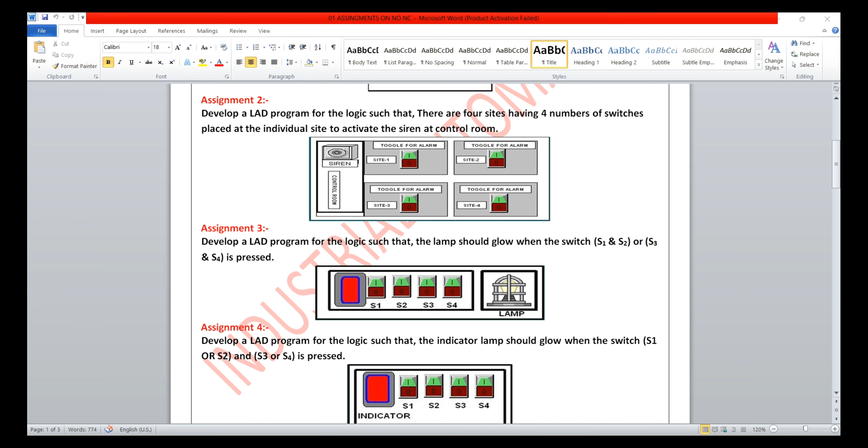सॉफ्टवेयर के अंदर हम कैसे प्रोग्रामिंग देखते हैं, सिमुलेटर कैसे यूज करते हैं। प्रीवियस क्लास में मैंने वीडियो बनाया था कि RSLOGIX सॉफ्टवेयर कैसे ओपन होता है। आज से हम स्टेप बाय स्टेप प्रोग्रामिंग सीखेंगे, कैसे प्रोग्रामिंग एंट्री करेंगे, कैसे इनपुट आउटपुट एड्रेस देंगे।

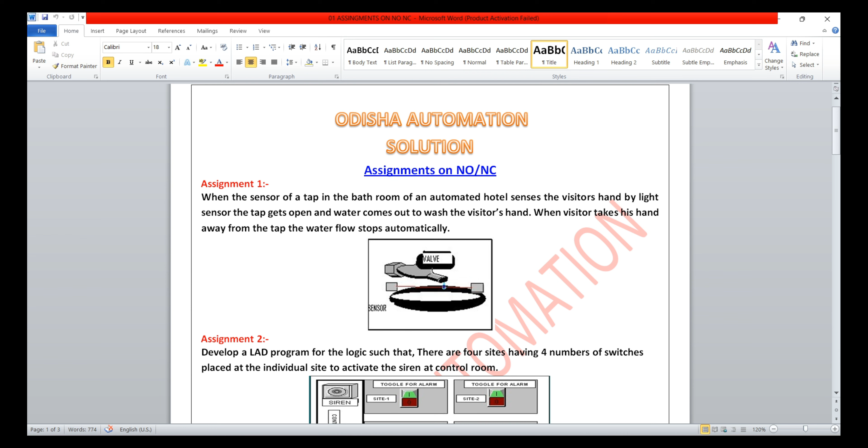पहले हम स्टार्ट करेंगे असाइनमेंट ऑन NO NC। आज हम सीखेंगे NO NC के बारे में। NO मीन्स नॉर्मली ओपन कॉन्टैक्ट और नॉर्मली क्लोज कॉन्टैक्ट। एक स्विच में दो टाइप का कॉन्टैक्ट रहता है, एक NC कॉन्टैक्ट होता है, एक NO कॉन्टैक्ट रहता है।

दोनों कॉन्टैक्ट को लेके हम आज प्रोग्रामिंग करेंगे। देखेंगे प्रोग्राम: Develop a ladder program for the logic so that there are four sites having four number of switches placed at the individual site to activate the siren at control room.

देखिए, four sites is given. This is site 1, this is site 2, this is site 3, this is site 4. Four sites are there and one siren is there in control room. If any emergency happens in site 1, site 2, site 3, or site 4, anyone can toggle the alarm.

Siren ऑन करने के लिए हमें स्विच को ऑन करना है। किसी भी एक स्विच को ऑन करने से सायरन ऑन होगा। ये प्रोग्राम के अंदर कैसे डेवलप होता है आज हम करेंगे। पहले चार स्विच दिए हैं, साइट 1, साइट 2, साइट 3, साइट 4। ओके, स्टार्ट करेंगे।

This is the site 1 switch. Okay, this is the siren.

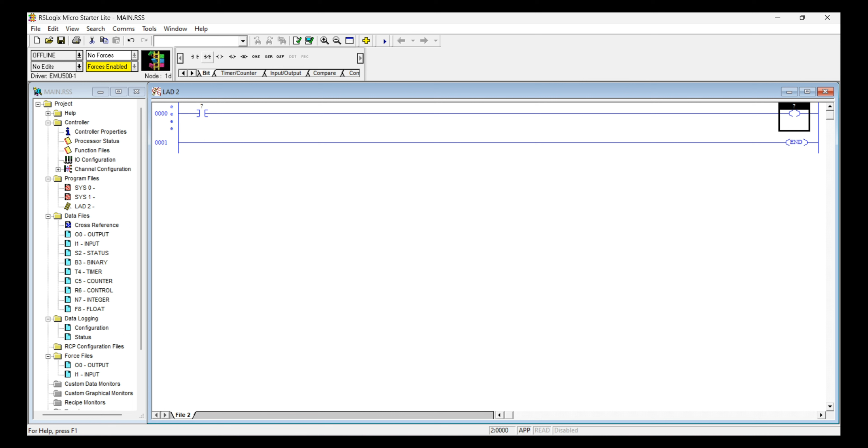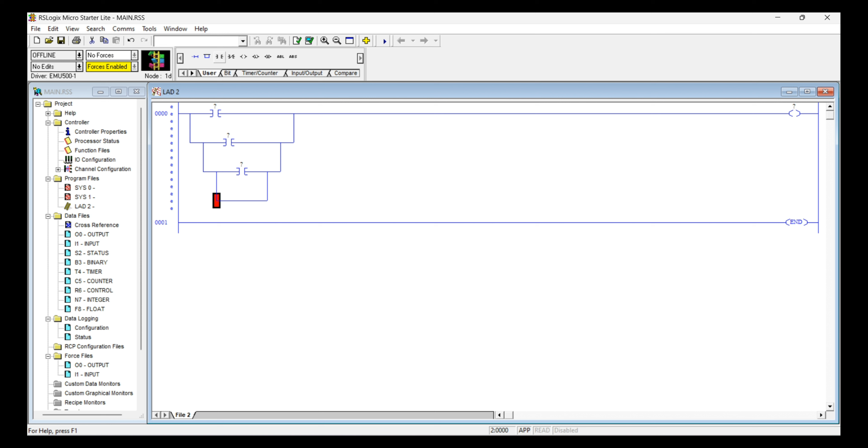I'm placing the second switch. Then for the third switch, this is for third site switch. See, this is the fourth switch. Switch 1, switch 2, switch 3, switch 4, meaning site 1, site 2, site 3, site 4.

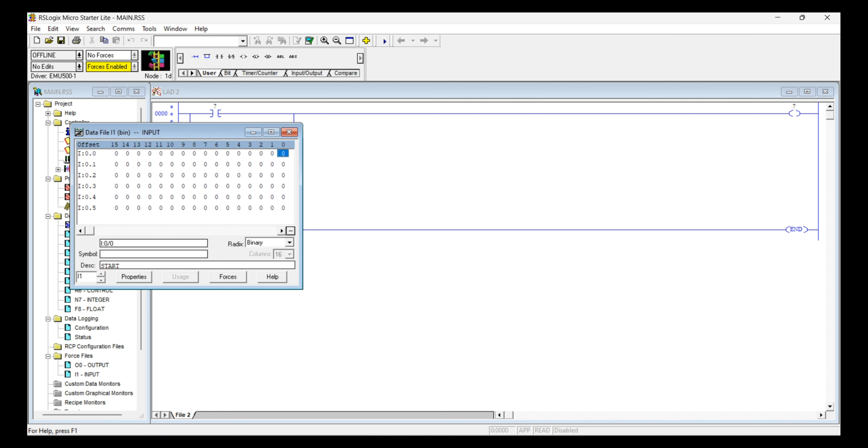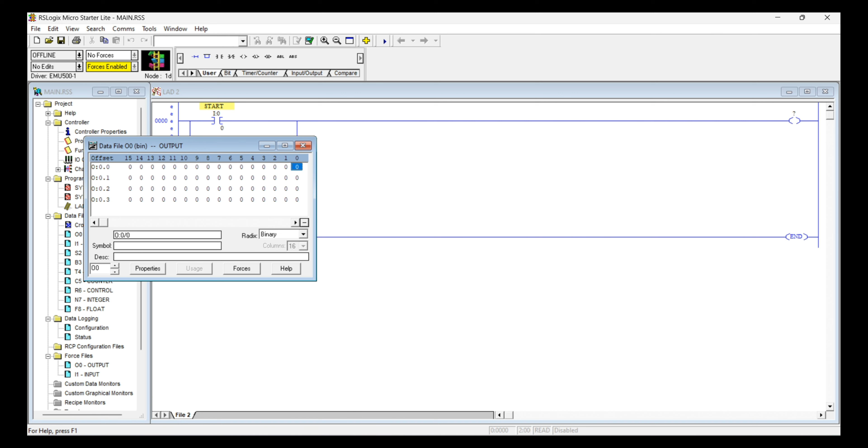You have to address the input. First मैं दे रहा हूँ 0.0, फिर सेकंड के लिए 0.1, थर्ड के लिए 0.2, फोर्थ के लिए 0.3। आउटपुट: this is the siren, O 0.0। you have to write siren।

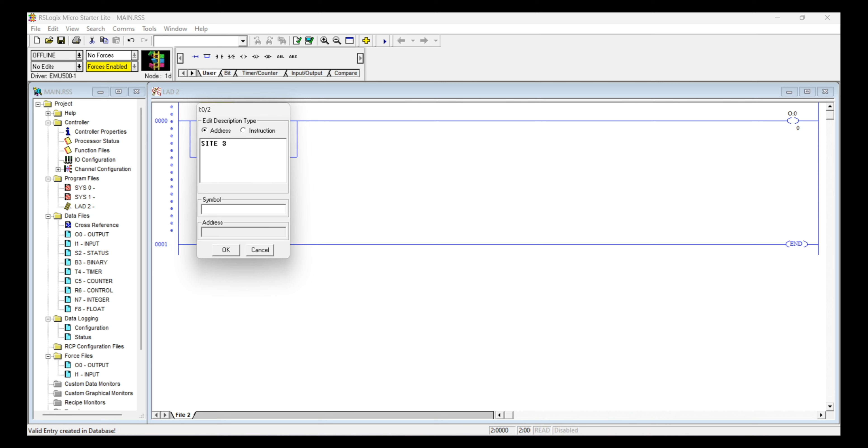For siren, edit description here as site 1। this is for edit description। site 2, naming as site 2। this was naming as site 3, and this one naming as site 4। four sites, and this is the siren।

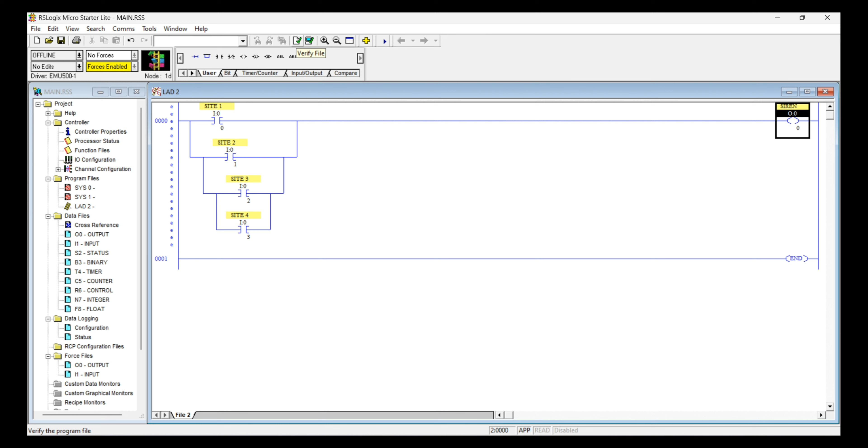After writing the program, for simulating some steps are there: go to verify file। पहले verify file करना है। verify has completed, no error। then verify project।

Then go to download. We have to download the program in PLC. Then go to run the program.

अब हम प्रोग्राम के अंदर जाएंगे देखने के लिए। Develop a ladder program so that there are 4 switches placed at individual sites to activate the siren in control room।

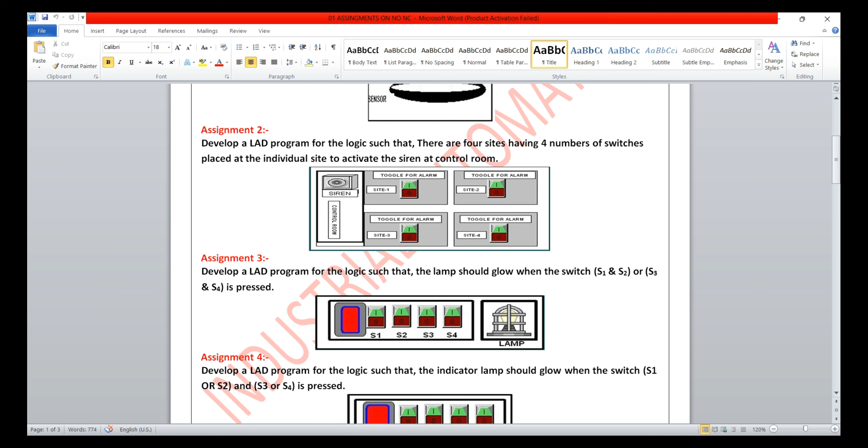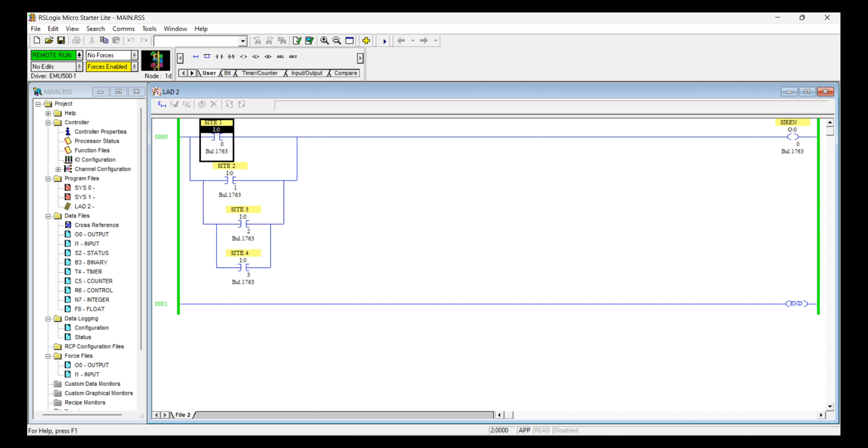See, this is for site 1. When I toggle the site 1 switch, the siren is blowing at that time. When I release the switch, the siren is in off condition. Same in site 2 also.

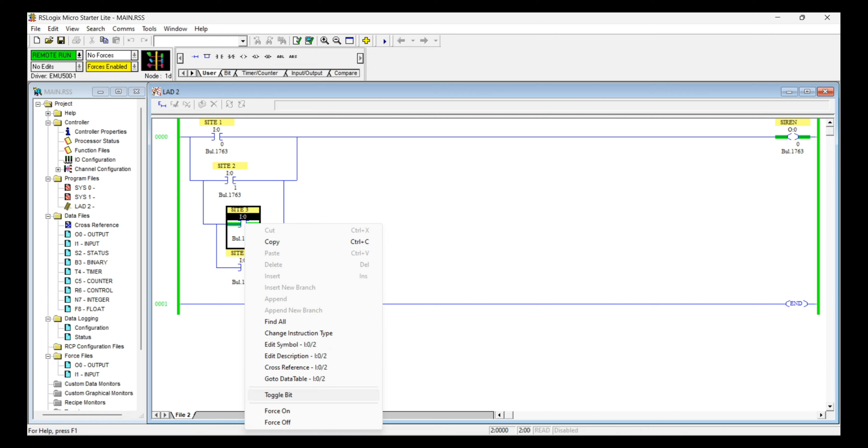If we turn it on, the output is on. If we release the push button, the siren goes to off condition. Same for site 3 also, you have to check - site 3 is also working. Then site 4 also you have to check. Every site is running fine.

Then move to second program. Go to offline. For new rung, click here, then run the branch. New rung, new rung.

Third number: Develop a ladder program for the logic so that the lamp should glow when the switch S1 and S2, or S3 and S4, is pressed. See, S1, S2 or S3 and S4.

I'm placing the S1 switch, S2 switch, then output. Sound is not required now.

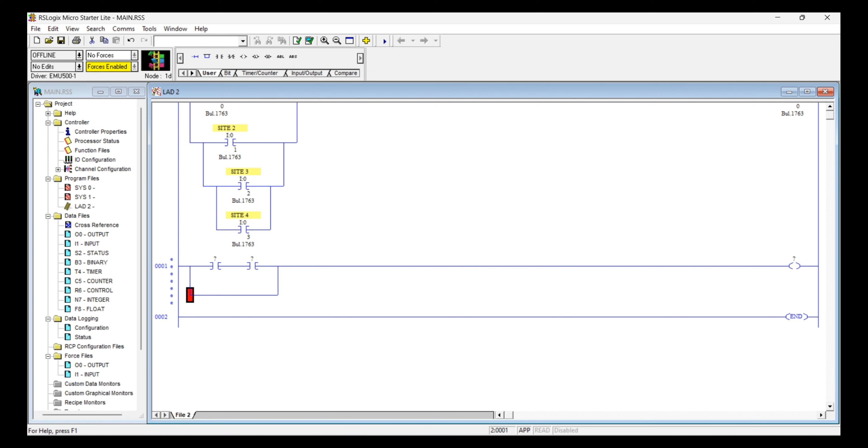S3 switch, S4 switch. With the naming, we have already used up to S3. Then for S4, I 0.4, I 0.5, then 6, then 7.

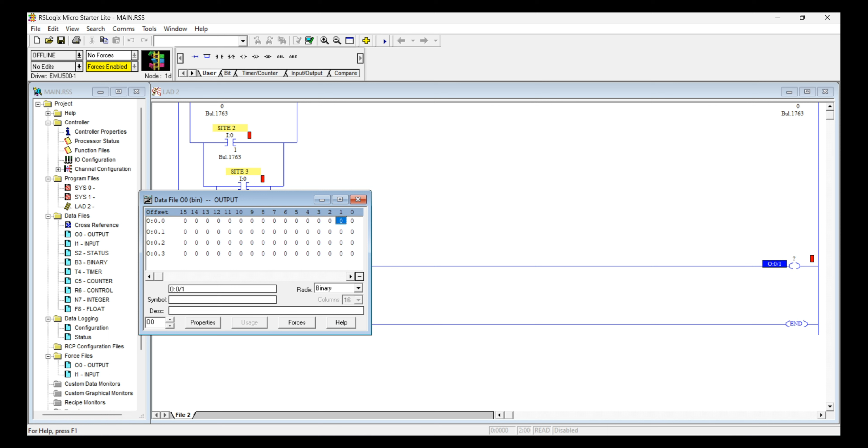For output, I have used Q 0.0, this is 0, 1. This is for S1 switch, this is the S2 switch. This is S3, S3, and this is S4. And output is lamp.

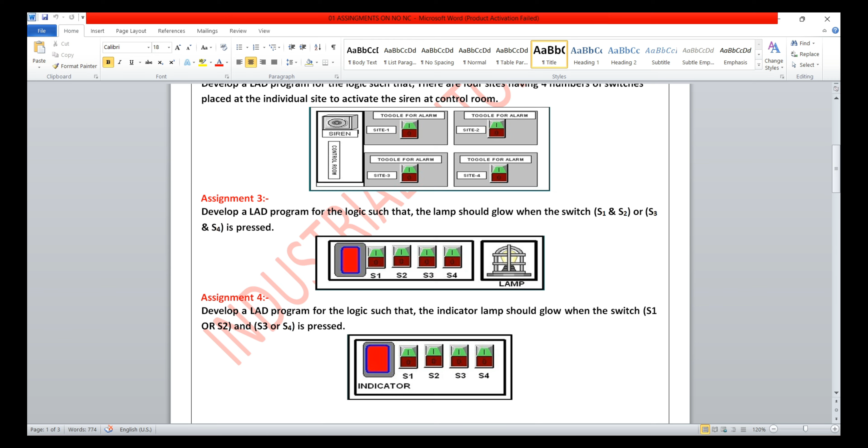Logic: S1 and S2 or S3 and S4. See, verify the file, verify project, download the program, then go to run. It's online.

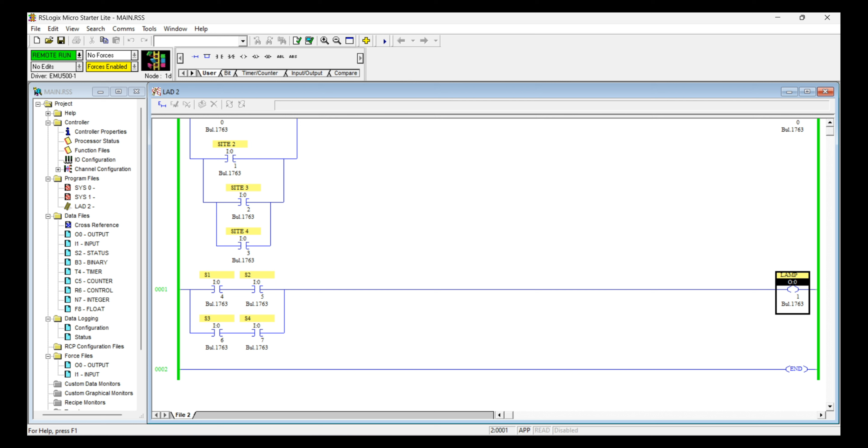See, S1 and S2 - when both switches are on, meaning AND gate, both switches are on, at that time the lamp is glowing. Same like OR condition, S3 and S4, at that time also the lamp is glowing.

Okay, see next program, go to next program. Develop a ladder program so that the indicator lamp should glow when the switch S1 or S2 and S3 or S4 condition is satisfied.

Meaning S1, S3 on means indicator will glow; S2 and S4 on means indicator will glow; S1 and S4 on means indicator will glow; and S3, S2 on means also indicator will glow. See the program.

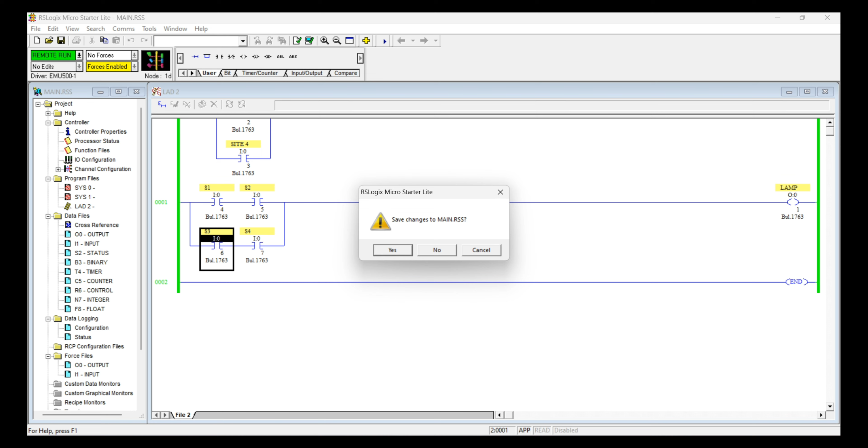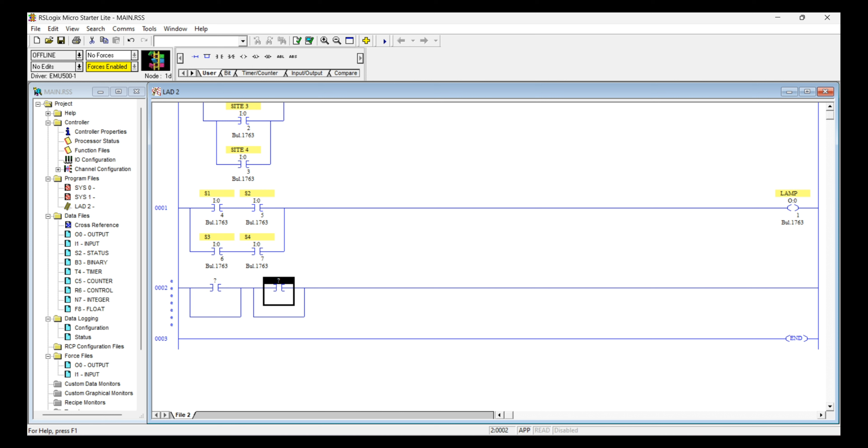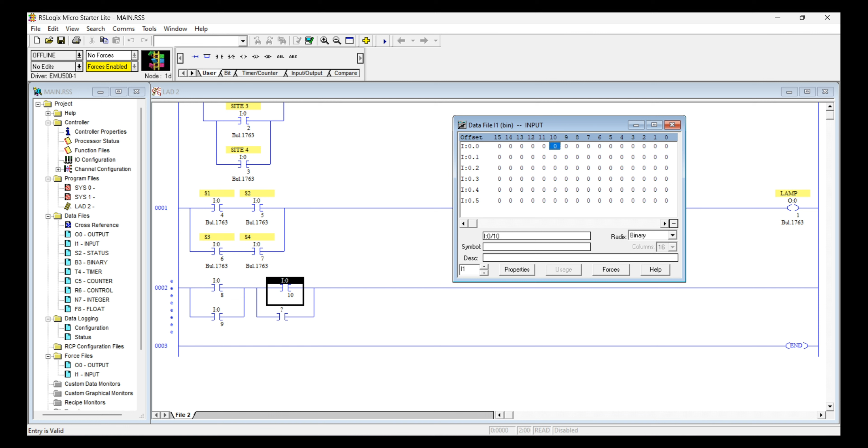For 0 to 7 we have used addresses. After that we have to use 8, 9, 10, 11.

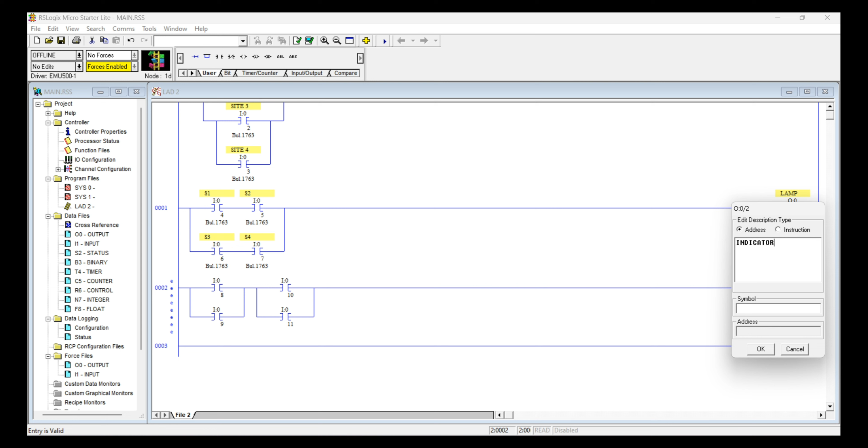Output already used 0, 0 and 1, now we are using 2, and indicator.

This one for S1, S2, S3, S4.

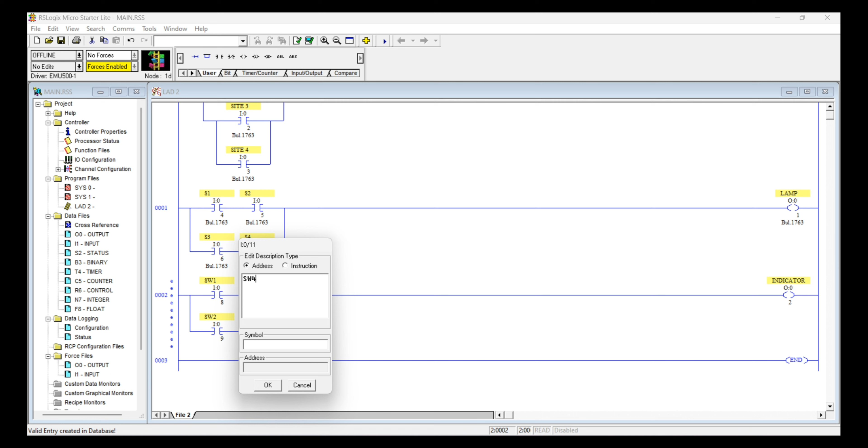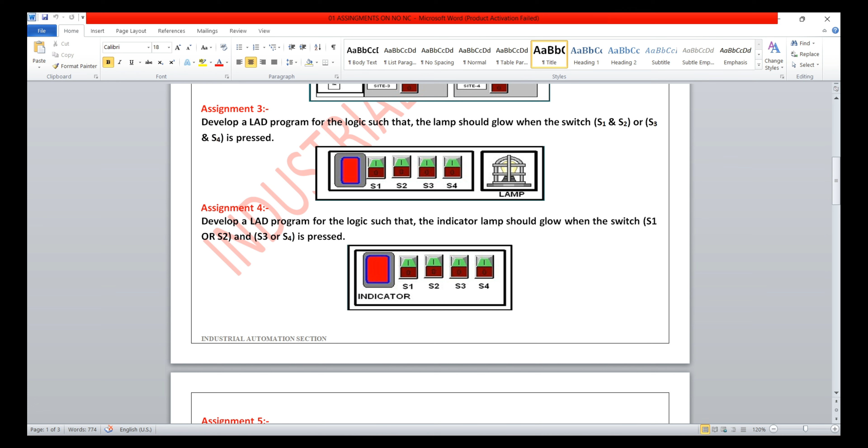Verify project, then download the program, go to run. Then see S1 or S2, and S3 or S4.

S1 and S3 - the condition is satisfying, indicator is glowing. S1 and S4 also - see, indicator is glowing. Same like S2.

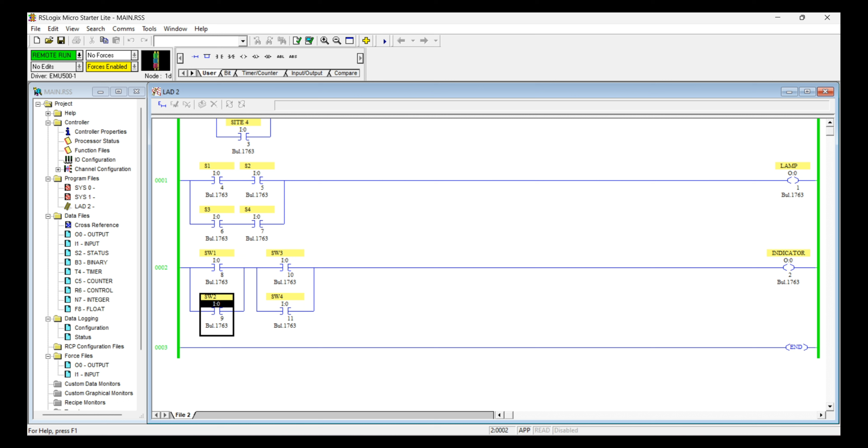SW3 also indicator is glowing. Same, SW4 also the output is energized. Then apply.